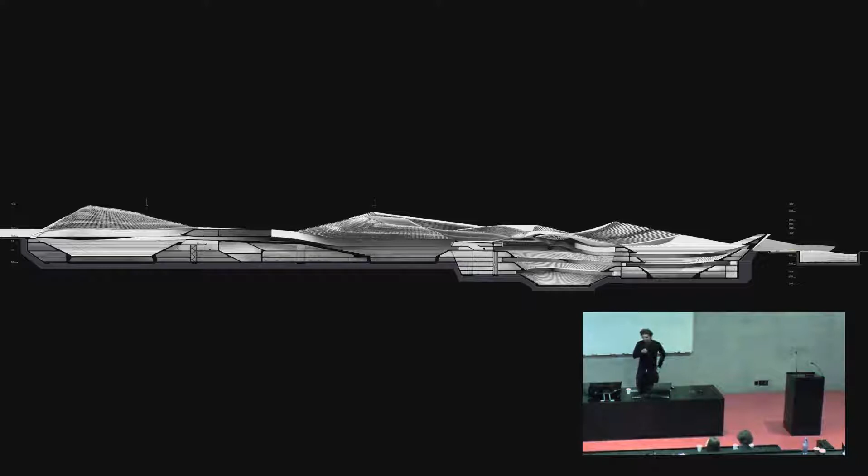So the theme of today's presentation is integrated infrastructures, and I will start with a section I produced in 2009 as part of my diploma project in Vienna, which speculates on a new kind of Olympic village, where all the stadia connect into one giant infrastructure. Spectators then have the opportunity to see multiple events at the same time, with the benefit of the close proximity of the different stadia.

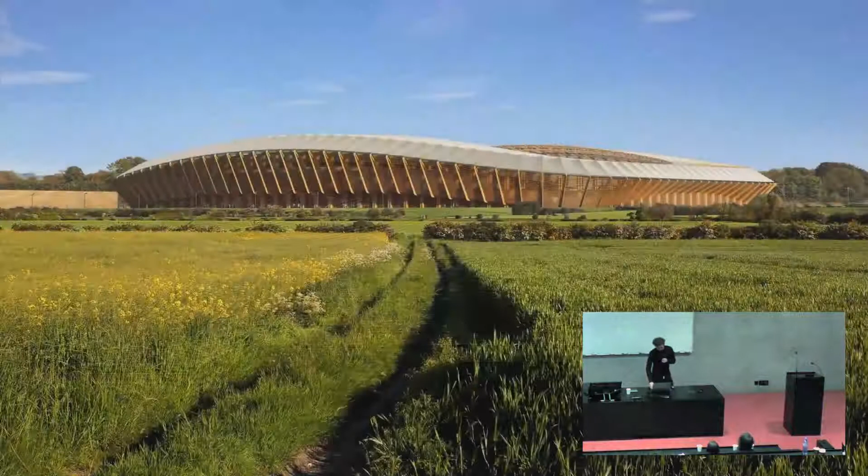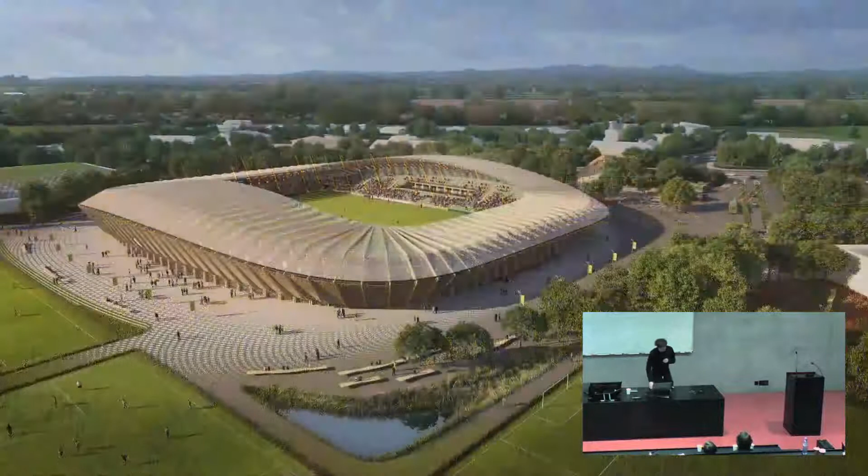I think this section was quite instrumental for me, so I'm going to show it again. It led not only to a passion for sport typology in my professional practice, but also, along the way, to other themes like structural clarity. I was always interested in expressions where one can clearly read the relationship between tensile and compressive forces. So, multiple stadia that I was involved in.

Then I'll jump to this one, because two years ago I got a brief that allowed me to revisit the idea from my diploma project. The brief was asking for a football stadium and an arena, and I tested whether this could work in terms of creating a new typology, where in one building system you integrate the football stadium, a multi-purpose arena, and a conference center in the middle, which you see in the section.

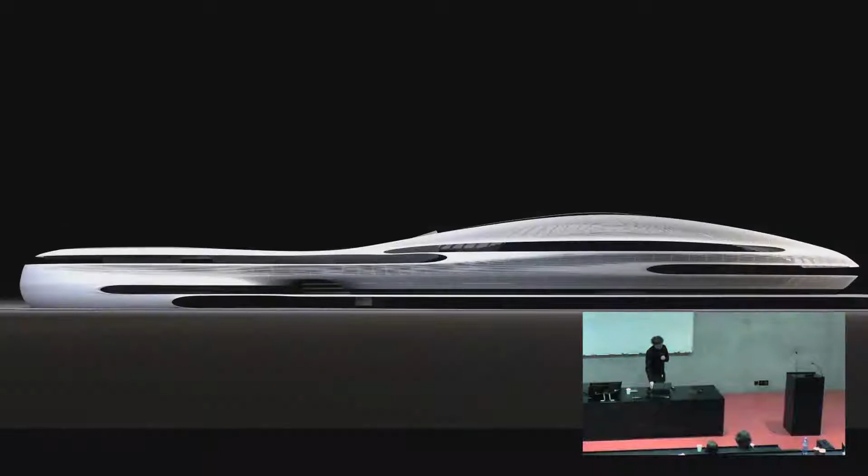What was also important was the introduction of ancillary program, so you can clearly read it through the cuts on the facade. I take a certain interest in stadia because they are the only typology where you don't have to argue for scale.

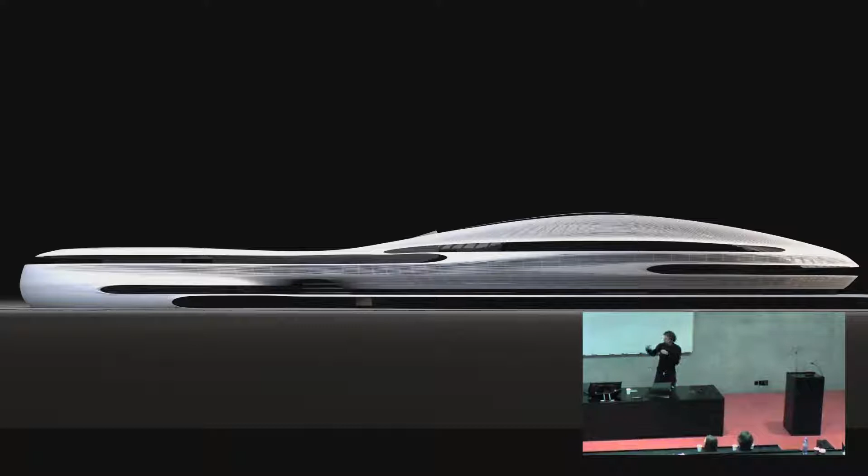Here you can see the face of the stadium, where the introduction of the cuts and the invitation of other offerings and programs creates a different urban face. You can see here that through the cuts you don't only read the program, but also the structural clarity that I mentioned before.

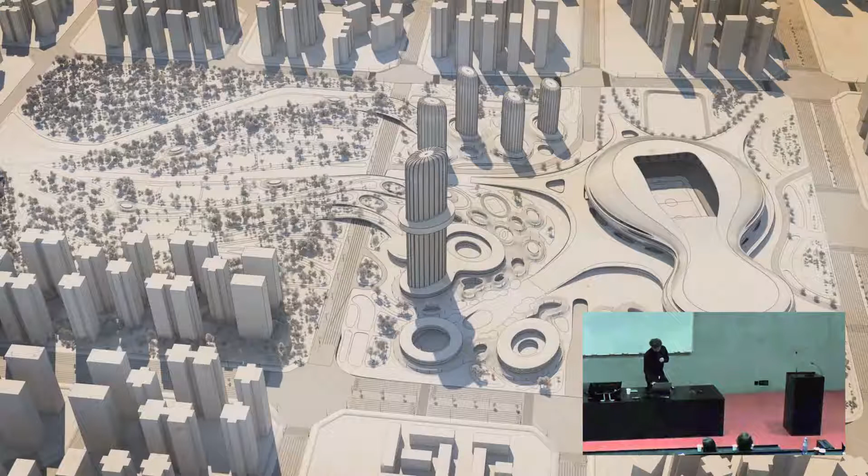And yeah, so this is how it sits there. I think this is how the venue is organized. Don't mind the fruit salad around it, it's more about the piece and how it operates.

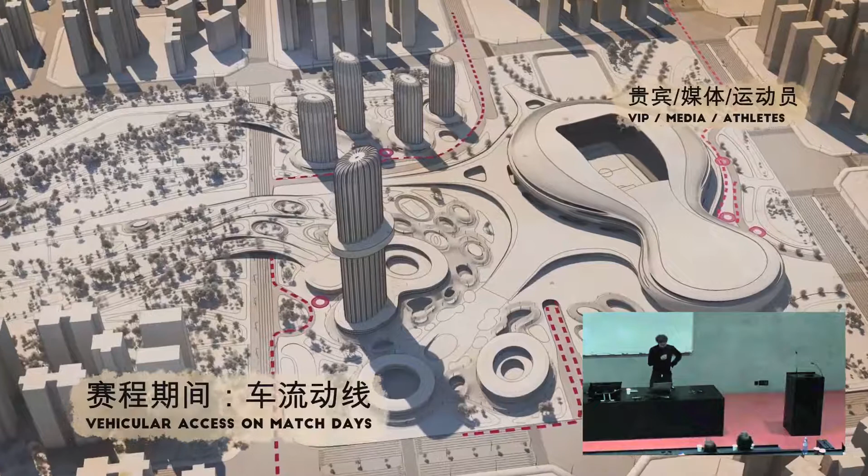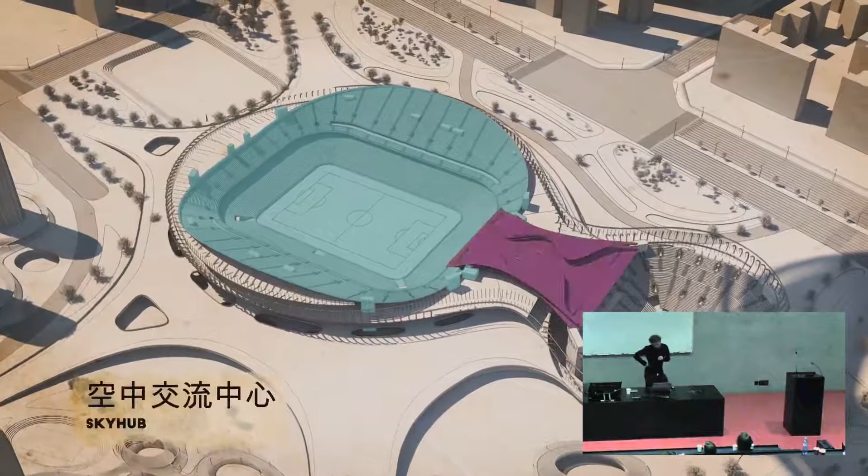So you see on the right the multi-purpose arena. In the middle is the conference center, and on the other side is the 60,000-seat football stadium.

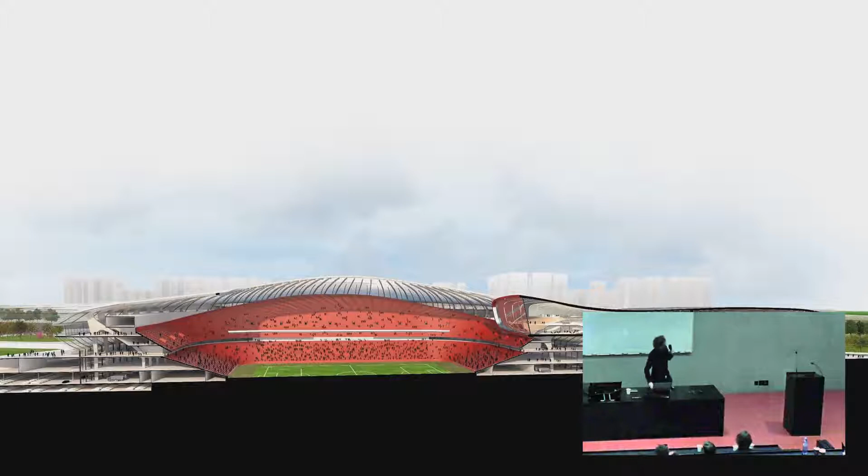When I revisited the section, it wasn't very different from the section I drew in 2009, so I kind of proved there was some intuitive idea that works. Here you see the inclusion of the other program, how the multi-purpose hall and the conference event sit there, and how it behaves towards the surrounding through the inclusion of the cuts and the program.

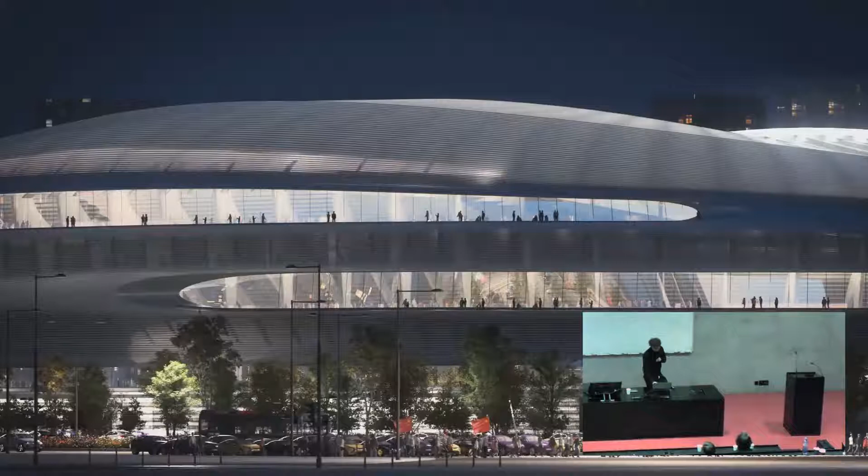This is how the inclusion of the additional program works towards the urban face, which I find quite successful. It sort of redefines the way stadia actually sit in the city.

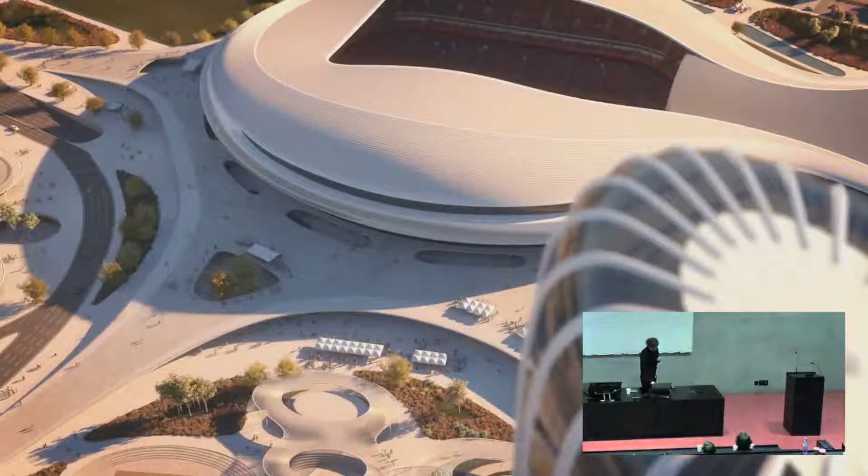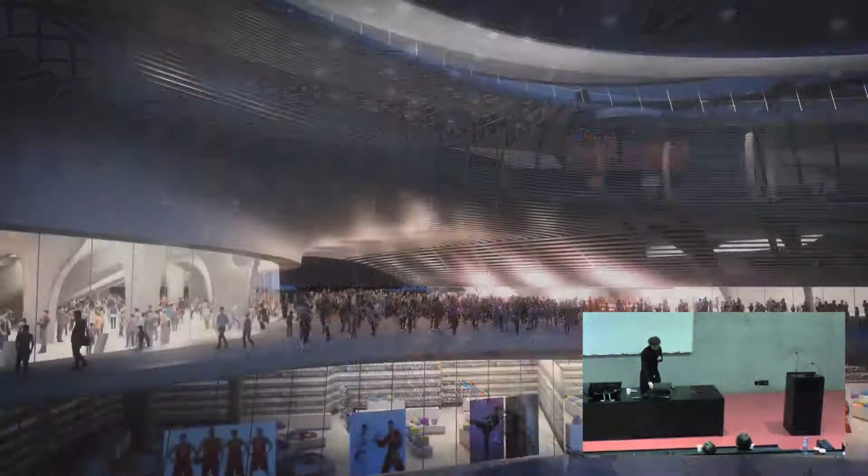I'll go quickly through that. You can see the experience at the same moment can really differ, from the football side to the conference center, and on the other side, as a visitor, you can experience the multi-purpose arena, which has several modes, from handball, volleyball, to boxing and concerts. There are also multiple offerings on the exterior, because redefining the typology also creates offerings for outdoor events.

And that led me into the theme of integrated infrastructures, where you speculate on the relationships of different typologies and what they could bring you in terms of architectural typology and expression.

So this is a theme that I then carried forward into my teaching. And I'm going to show you a couple of examples of what we're trying to chase in terms of integrated infrastructure at the Bartlett.

So I think the first one is a typology where we speculated on a new form of fish market, that it's based on a lab-grown tuna.

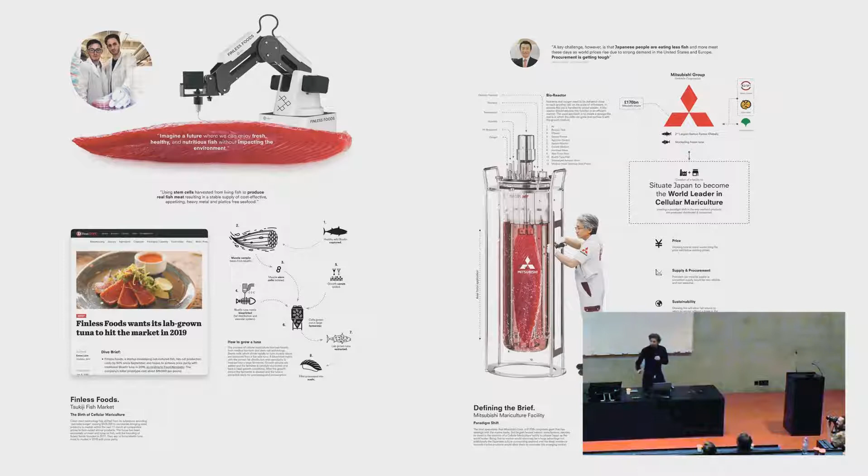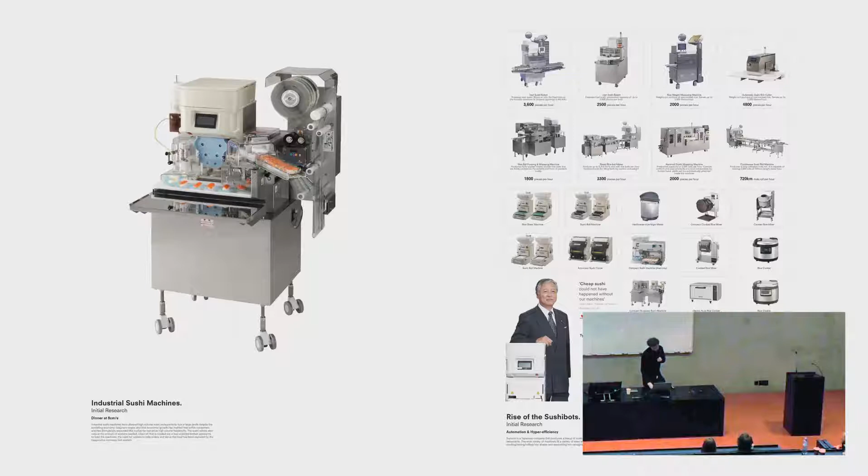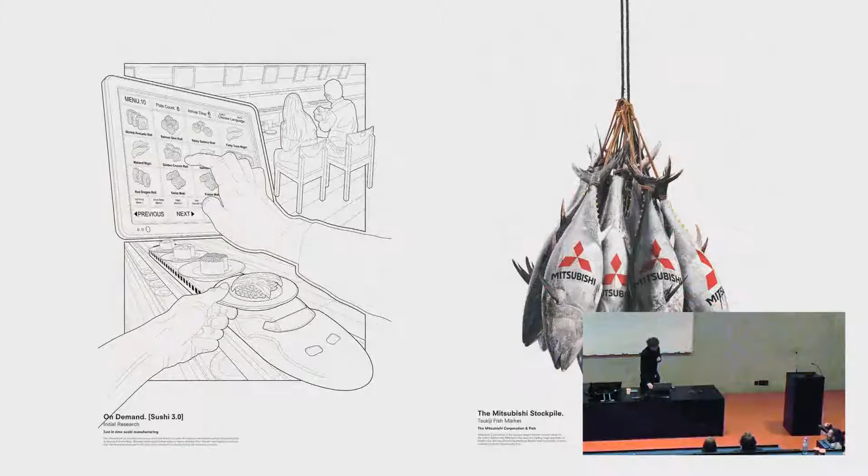I think it kind of plays with the idea that was quite present in Japan in terms of the sushi robots. They never really made it, but I think there was a very particular relationship to technology that the Japanese culture possesses. And also the idea of cyborg kind of comes in, the combination of organic and technology. As I said, it combines the production facility with the restaurant.

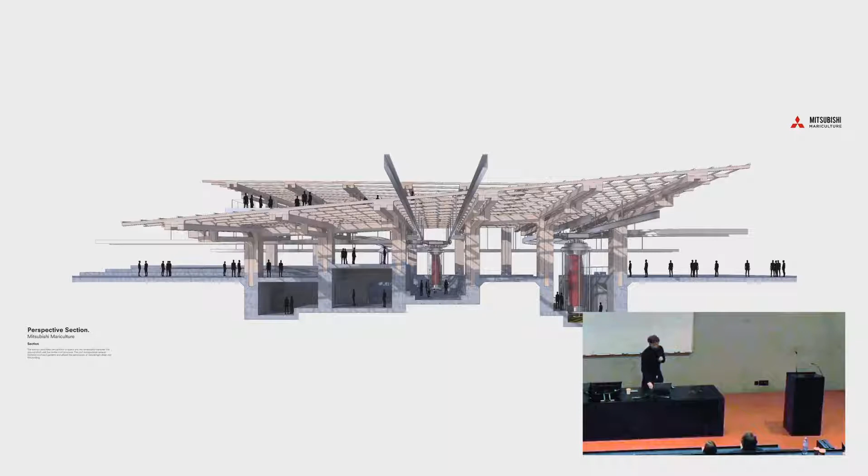So the basic idea was the relationship of a plinth that actually has the production facility in it, and then there was a kind of idea of a roof that is able to accommodate multiple programs, starting with the restaurant and going into the labs, etc.

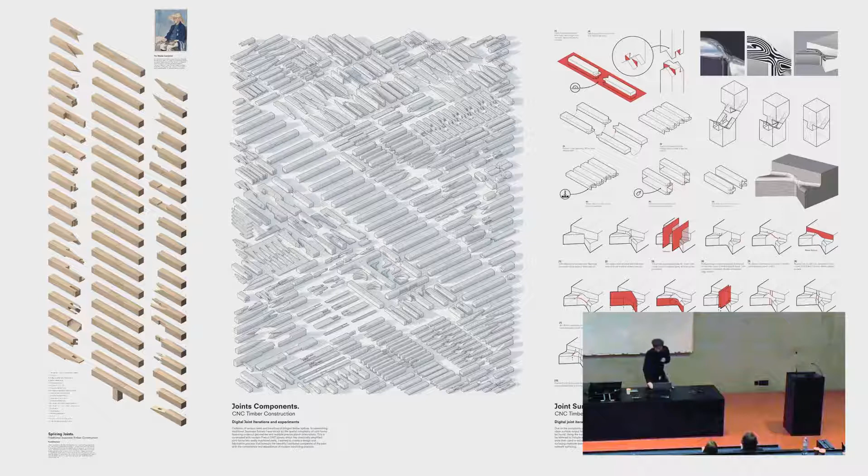Needless to say, we also take lots of interest in materiality and structural performance, so here you see the study into splices and into timber joinery. In my world, the joints within the building systems are all different because they respond to different conditions within the building, so they take different loads, different bending moments, etc.

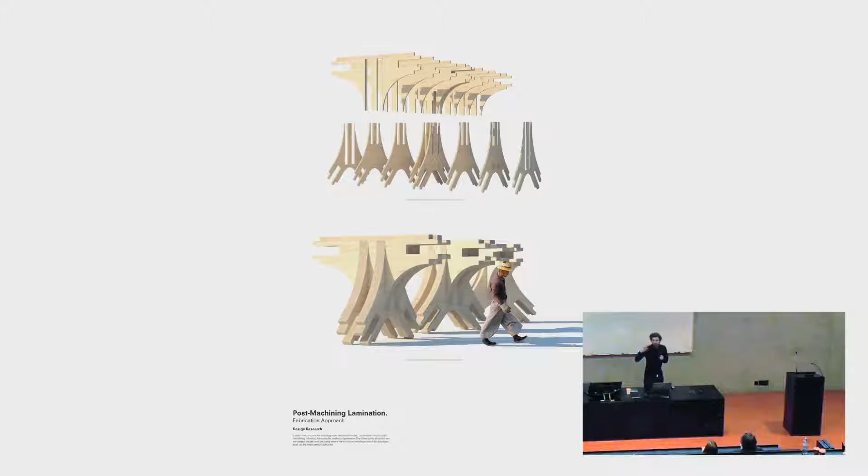So we also do lots of prototyping, and I think what is also important is the moment of the unexpected. We developed this layered joint that works quite well in bending, etc. But then I think the most unexpected moment was actually the scale of the joint, and it brings a very different offering to the architecture typology, and it gets much more intense when you speculate on that.

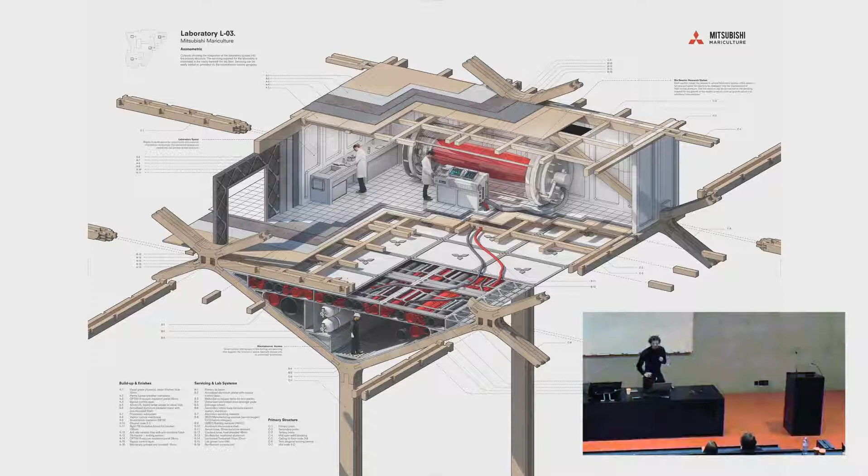So this is kind of the first encounter with the production facility. Here you see how the labs would be nested within that structural system, and then you can already read certain pockets within there.

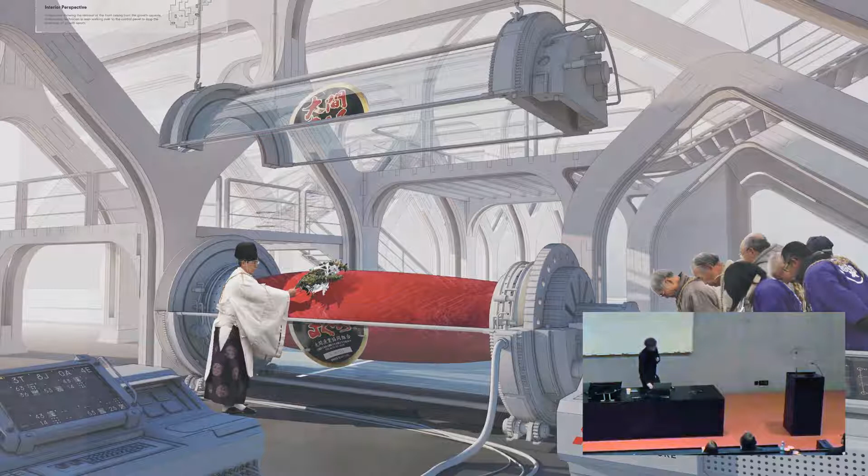This is a certain ritual that they always do when they fish a new tuna, so this is how that could operate with the lab-grown tuna. This is the auction facility that operates within the roof, within those pockets I was talking about before.

I think this is the kind of very calm elevation that basically brings the new typology, but what's behind that is the kind of very intense section that plays with the idea I presented at the very beginning on that sketch. So it really evolves into an organism that's able to combine the production facilities, the labs and the restaurants into even some Japanese courtyards here.

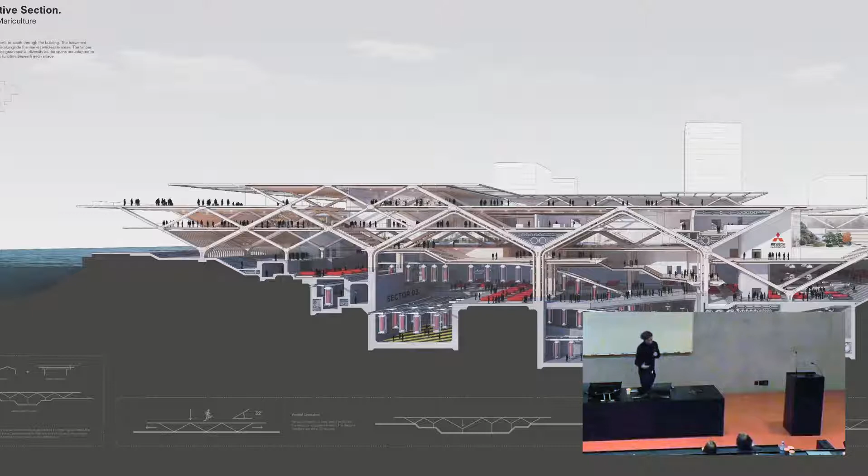So one is then able to create enclosures within the roof structure, and it doesn't operate on that logic of a plinth and a roof alone, but it starts to be much more. That's why you create a very integrated food infrastructure in this way.

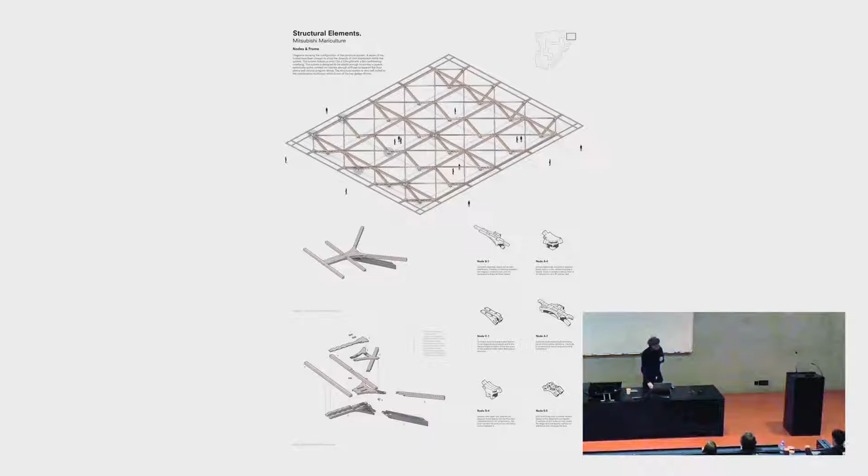Yeah, I mean, we take lots of interest in the structural performance, so actually it's quite elastic because of the seismic considerations. I'm going to skip that. So this is how the morning would look like, the new lab-grown tunas.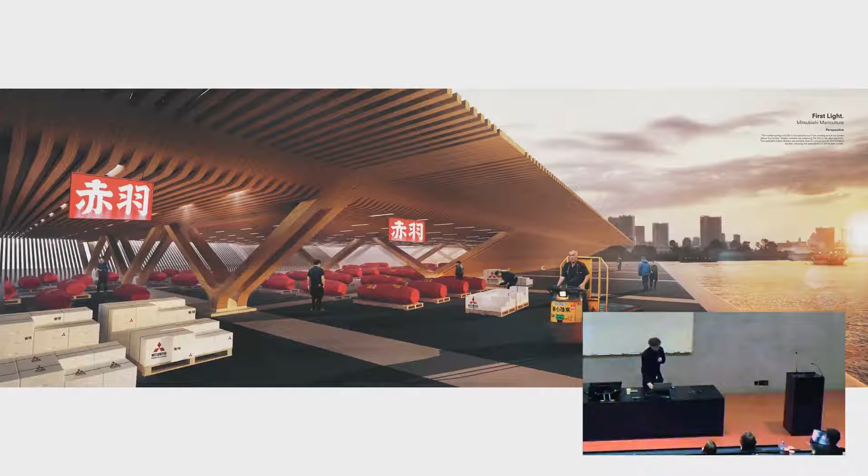And I think let's stick with timber for a while. This was a project we did this year. We used to call it Timber in the City.

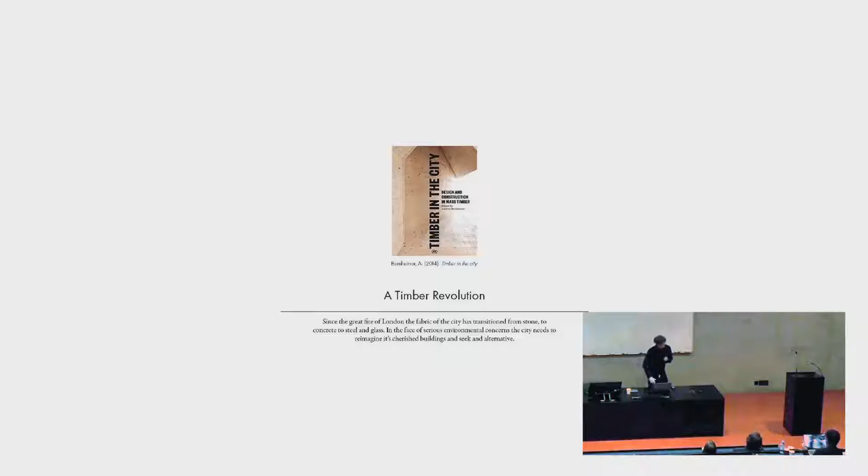I mean, here's timber in the city. But it's actually a speculation of what will happen if our civic infrastructure, as we know it here in London, would actually be all timber. Because, you know, it used to be that way, and I think there is no reason for ignoring timber on a large infrastructure project.

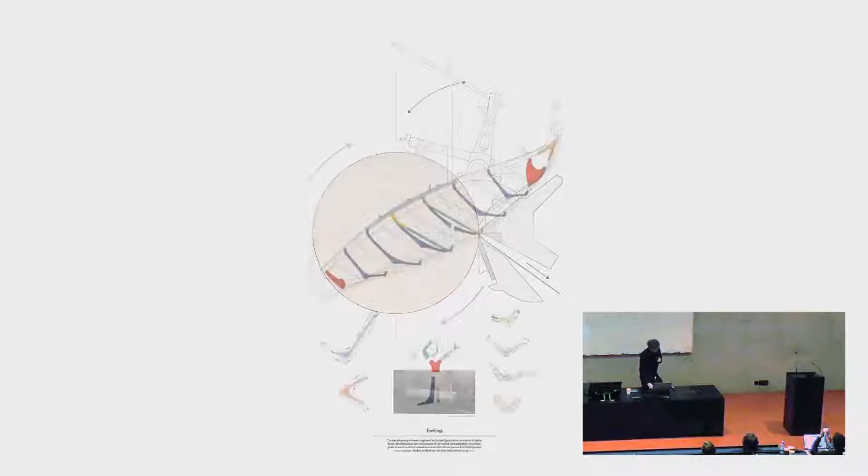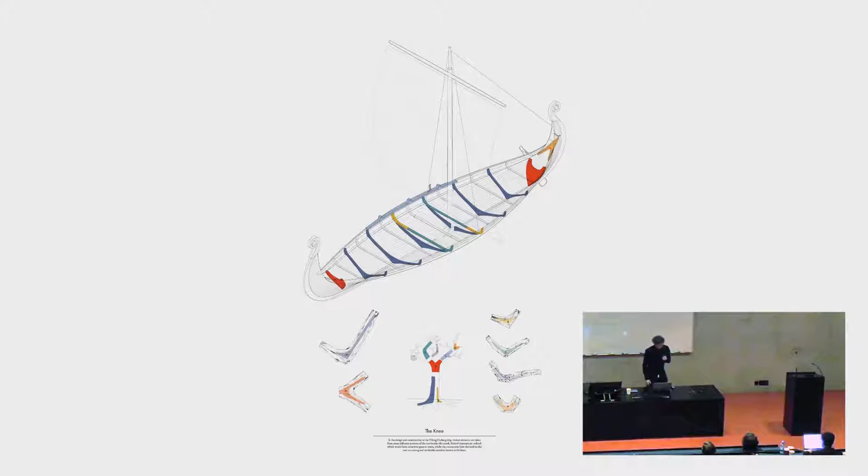So we started with the speculation of how a large infrastructure project in central London, all built in timber, would look like. I think this is an interest into the anisotropic properties of the material, recognizing and learning from the past, recognizing a different kind of grain pattern and how that contributes to different components, and that timber is obviously highly directional, so how it was used in the past, how that directionality was harnessed.

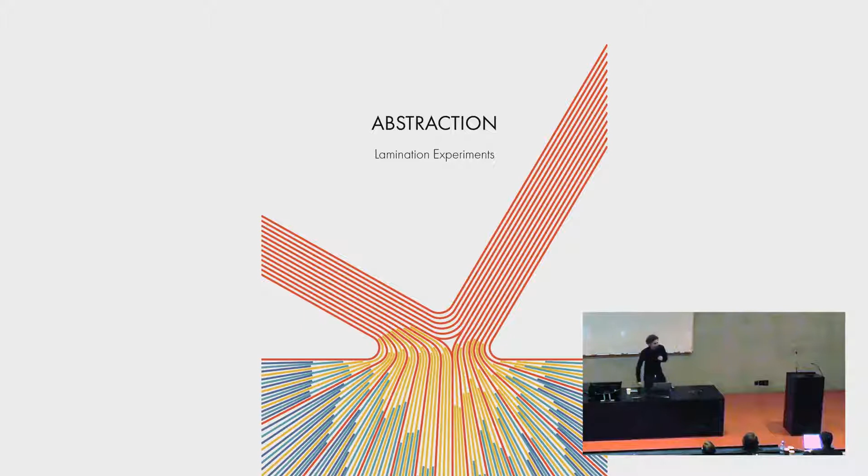And then going into the concept of lamination, but on a very different scale than is usually known. Almost thinking of lamination as a form of additive manufacturing, adding layers, so there are multiple components that all work together.

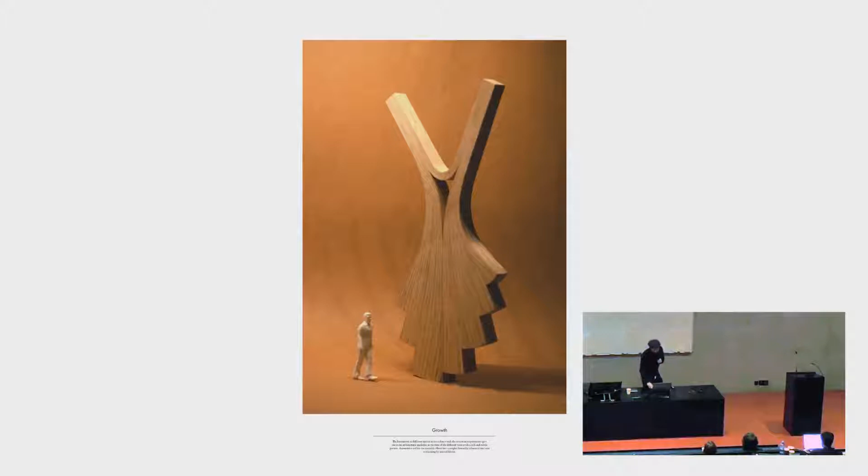I think again the scale is quite important. This is a model of a joint that is quite intense in scale, but it's all based on the idea of lamination, physically tested.

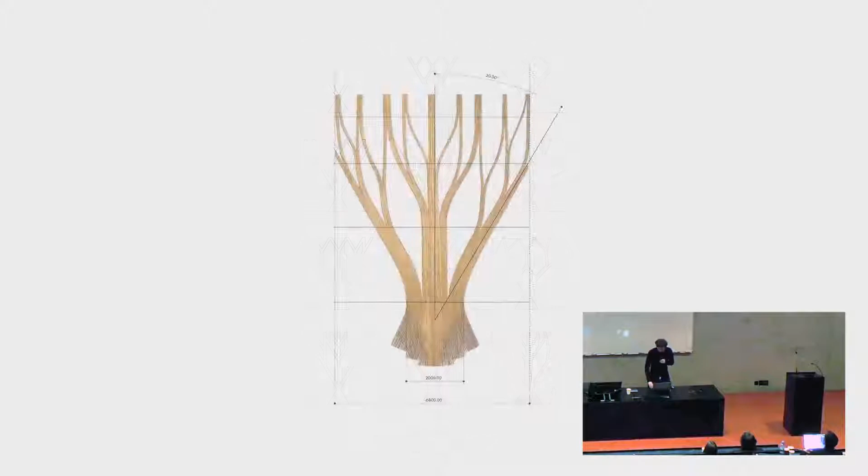Through that process you start to recognize the constraints in terms of scale that the timber structure would have, and also understanding these particular moments where you find the bending. This is something a tree does all the time, because timber is twice as strong in tension than in compression.

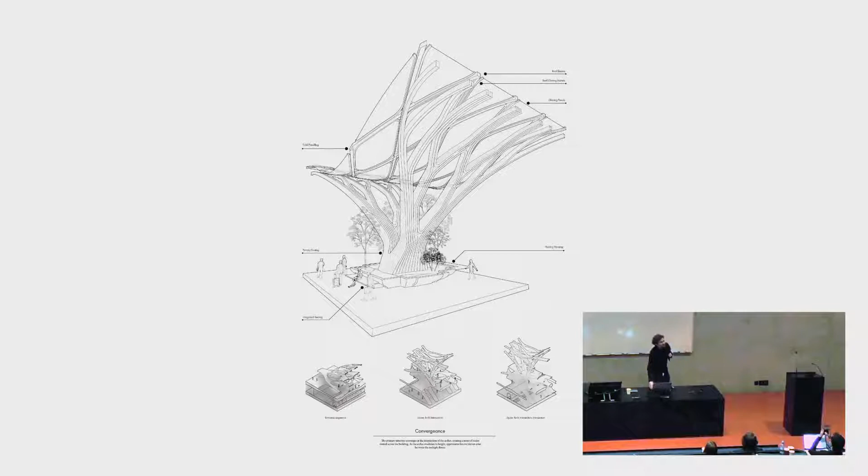So this is how it deals with bending, and then abstracting that principle and bringing it into the idea of the three-dimensional lamination that you can see here. It's not a coincidence that a structure like that would resemble a tree, because the principles are quite the same, how that works with the forces.

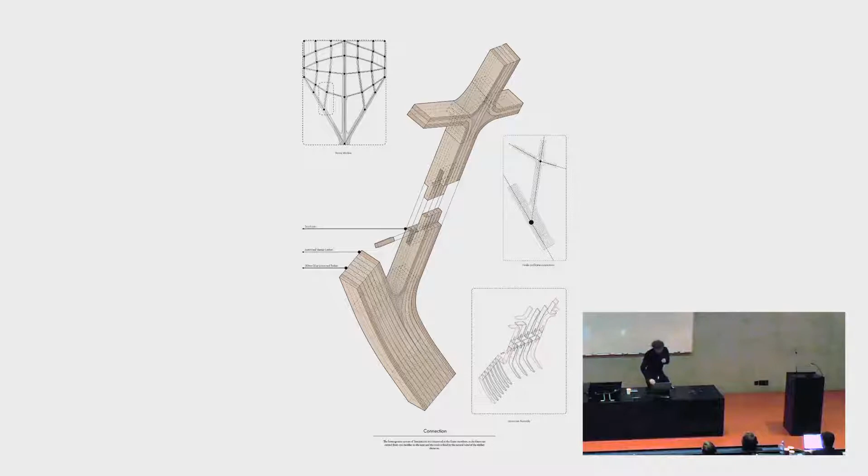Then obviously, again, there's splicing. Here you see the lamination. Again, something you need to understand is the scale of the component - some digital as well as physical testing.

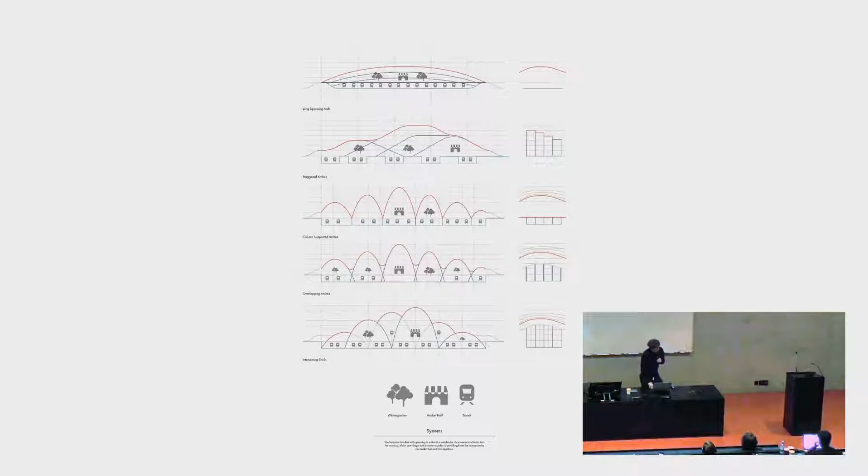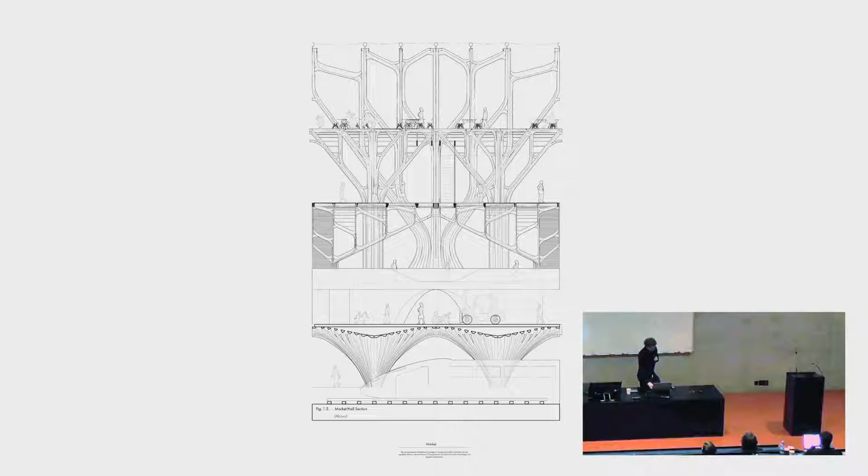Once we defined the constraints at the scale of that, we started speculating on the typology, and we developed a similar proposal to the project before, where you have several layers, starting with the train station, going all the way to the market, and always having nested restaurants in a higher portion of the roof, familiar with the relationship between tensile and compressive forces and what pattern they give you.

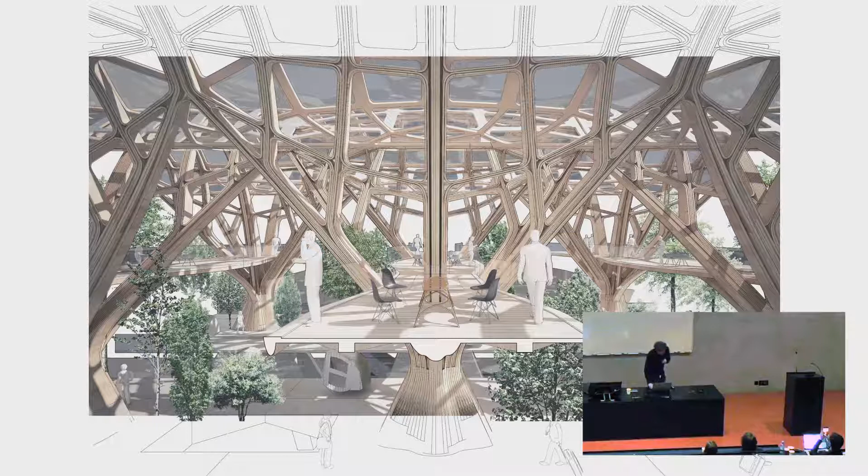And then this is a first glimpse into the very intense system of the 3D laminated structure. You can see how the parts are nested into that, how you start introducing program into that roof. You can see here the botanical garden above a train station, a glimpse of that.

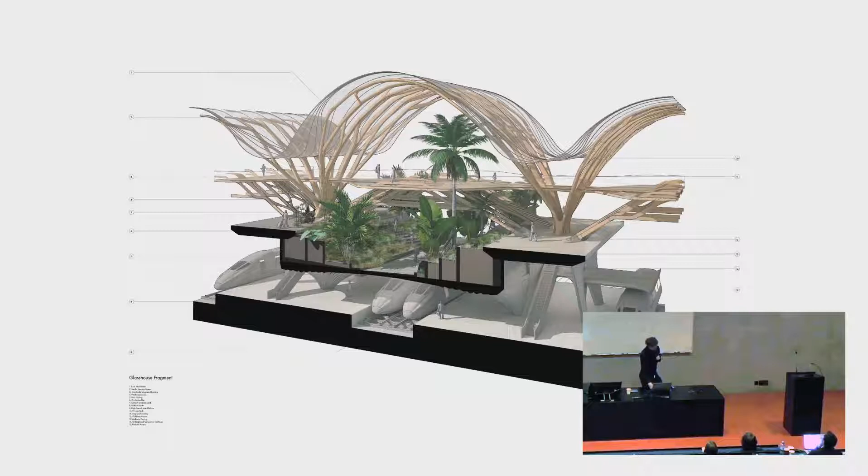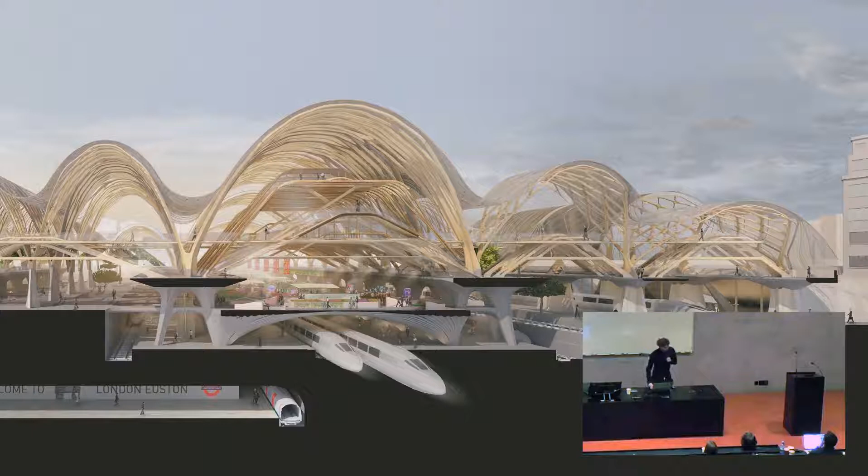I think it gets even more intense in the long section. Here you see the inclusion of the garden, how that works with the trains, and here you already start recognizing how the roof system is able to create enclosures. And then this is the kind of answer of Timber in the City.

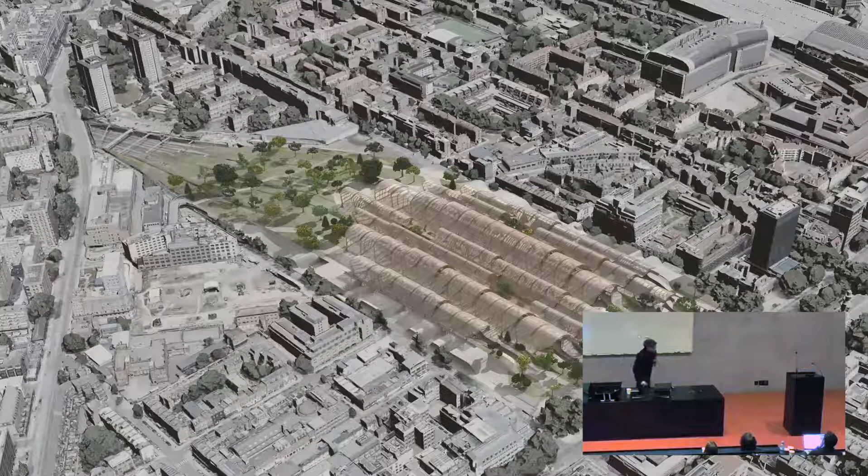That this is London, Euston, all in timber. I think also urbanistically, the edge towards the city is quite successful. Here you see a portion showing the program with the enclosure, so there could be restaurants, F&B, and other commercial opportunities.

And here you see the market. And here you see the cross paths - they're actually going through the entire station, and that connects the different programs.

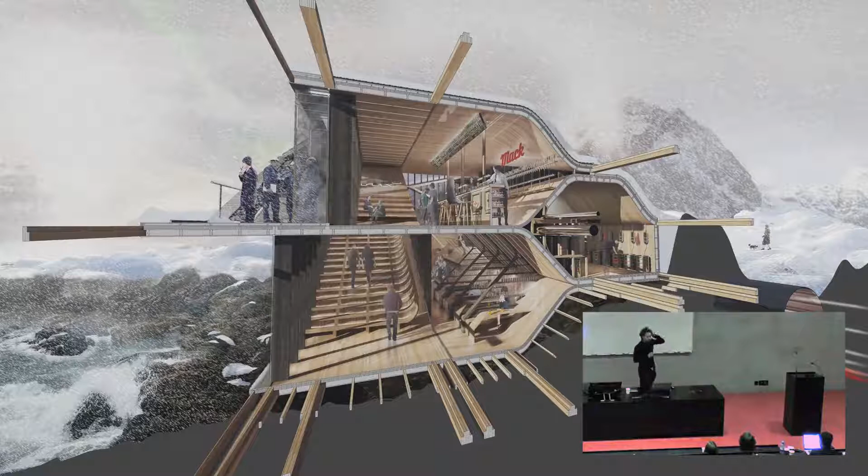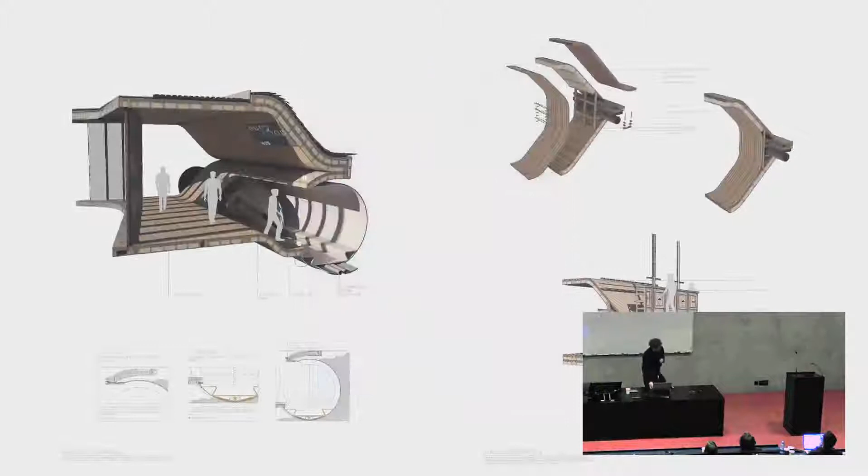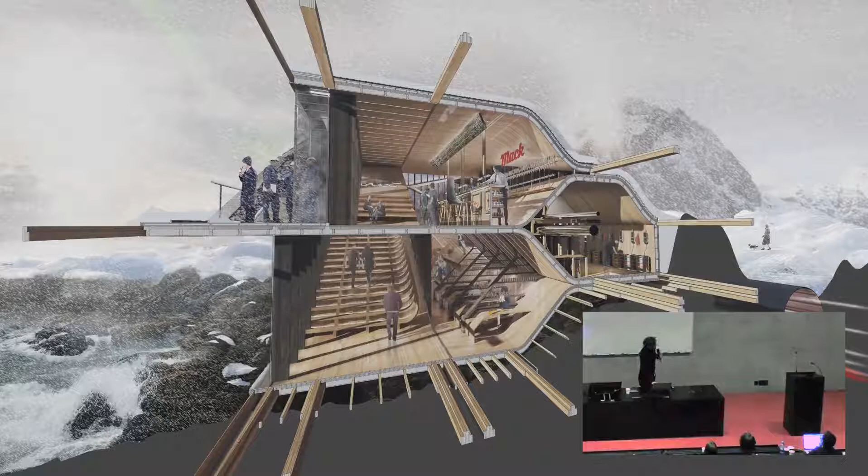So this is a railway station combined with a railway pub in the Arctic - the most northern brewery. You can see this bit of beer infrastructure, and how the typology of the pub actually influences the railway typology.

So, yeah, joinery is something that we're very much interested in. We argue for the full flavor project, so no hiding in the abstract - trying to articulate everything and then assessing that.

Yeah, so that's enough of timber. I'm going to flip quickly through some more urban proposals that we looked at. There was a project where we speculated on a massive population growth in Seoul, Korea, followed by the reunification of the peninsula.

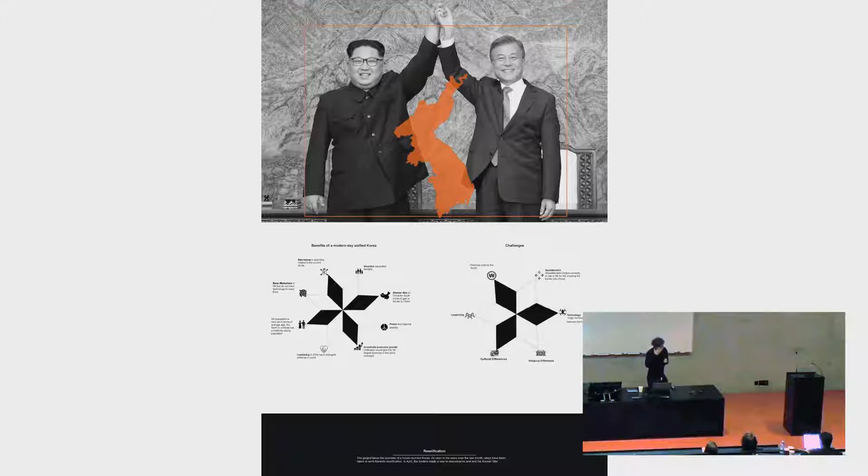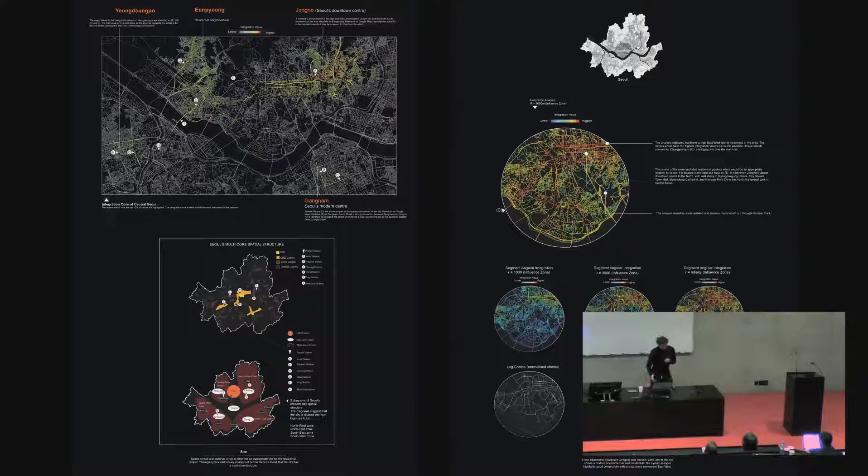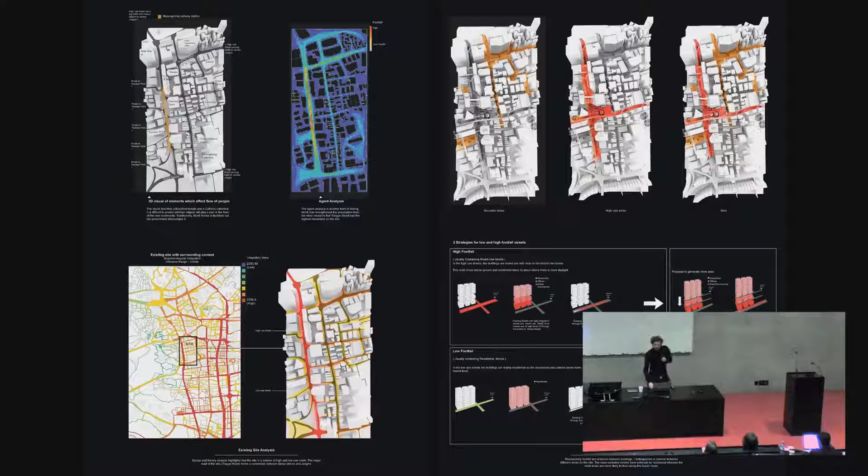So kind of obviously developing certain tools based on space syntax and understanding the spatial opportunities that such a dense urban fabric offers. Through that process, looking into the urban fabric of Seoul, we concluded that the streets and roads are actually a great opportunity for ultra densification of a city, but not at the expense of losing its character.

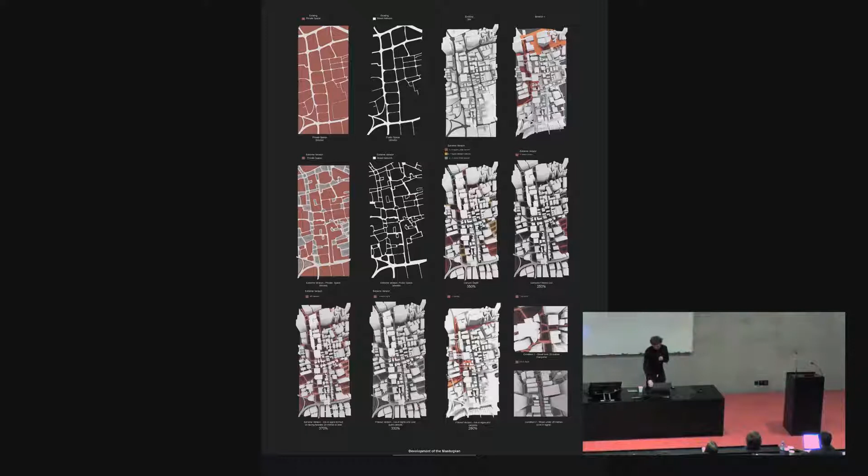So there was the idea that instead of adding a volume, you basically re-question everything within a certain area or the road systems, and you see the spatial opportunities that are there. So you dig down and start exposing basements, bringing the character of what is perceived to be overground also into the underground city.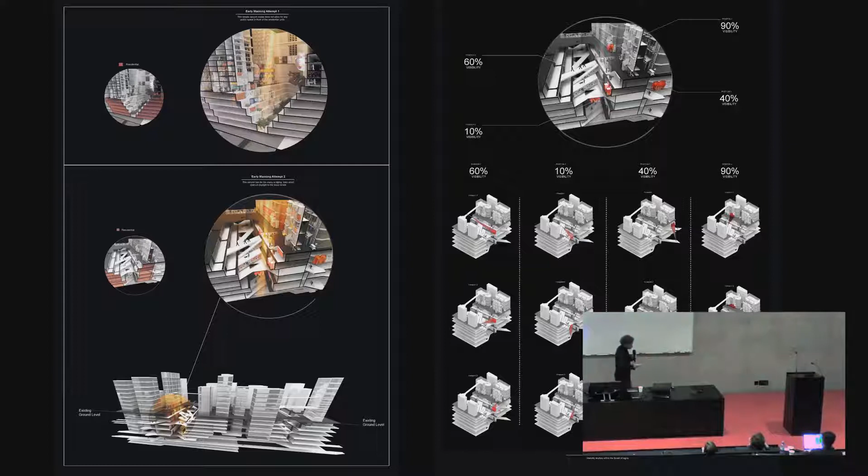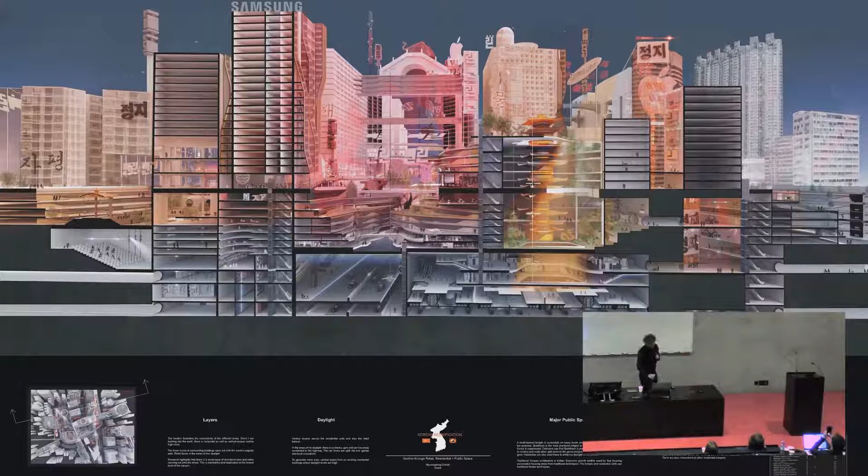So in a way, shown on this simple image, before and after. This is how you seek additional opportunities within our urban fabrics, and then you're able to achieve a certain ultra densification. This is how intense the section would get. You can recognize different pockets, almost cultural pockets, then more commercial pockets, and how roads and infrastructures are nested into that.

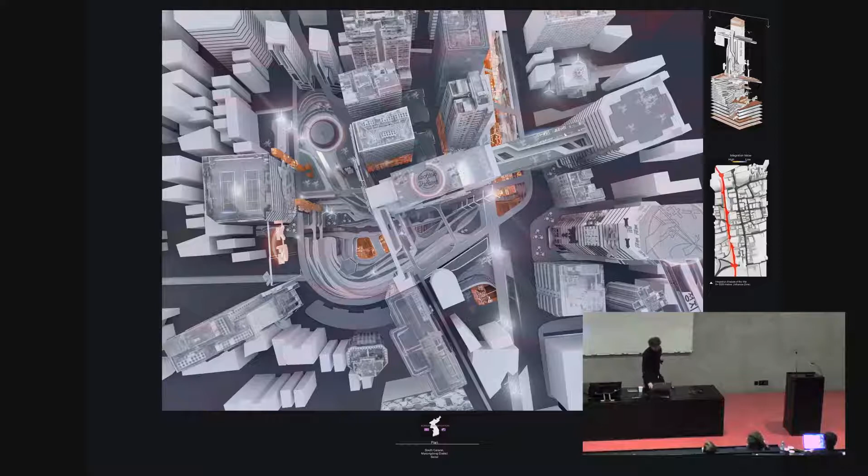And then I think what was quite important, we were trying to prove that you can densify a city without it losing its character, because I think Seoul is quite particular in that way. So I think the cyberpunk moments within that got more and more intense as you were adding additional urban fabric and finding opportunities there.

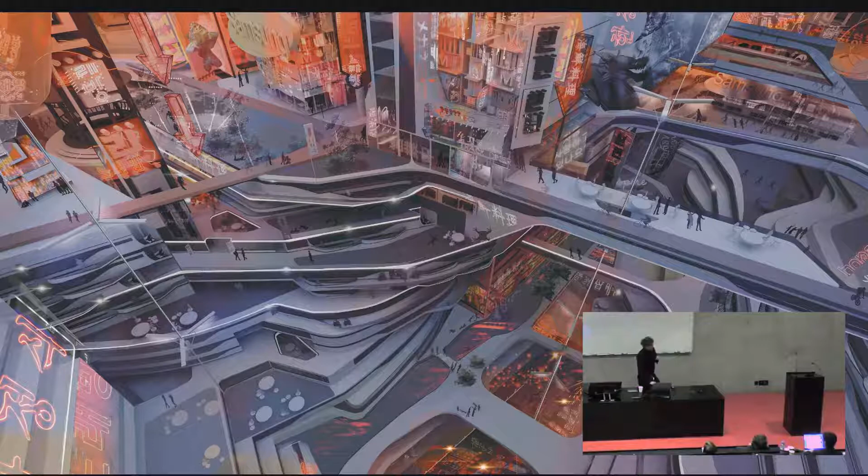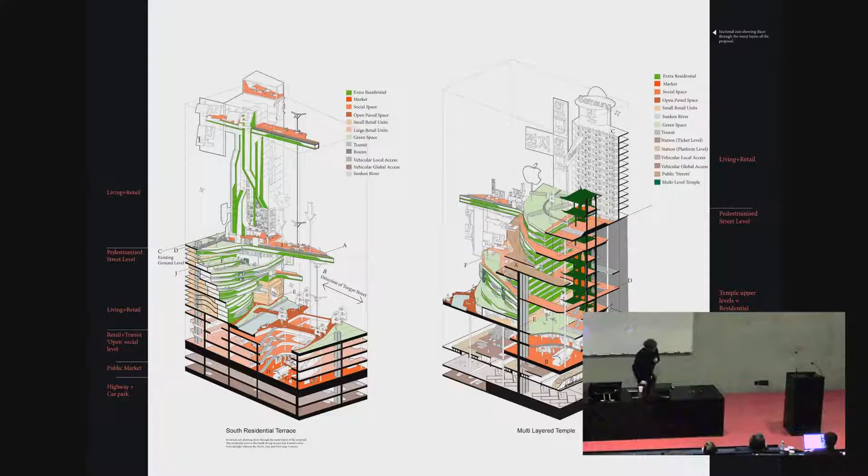And then there were the ideas of the hidden rivers, and how they would nest the program. So this is a section of how that would look like, starting from the original level, and then what nests underground. Some of the detailing of the terracing that occurs there.

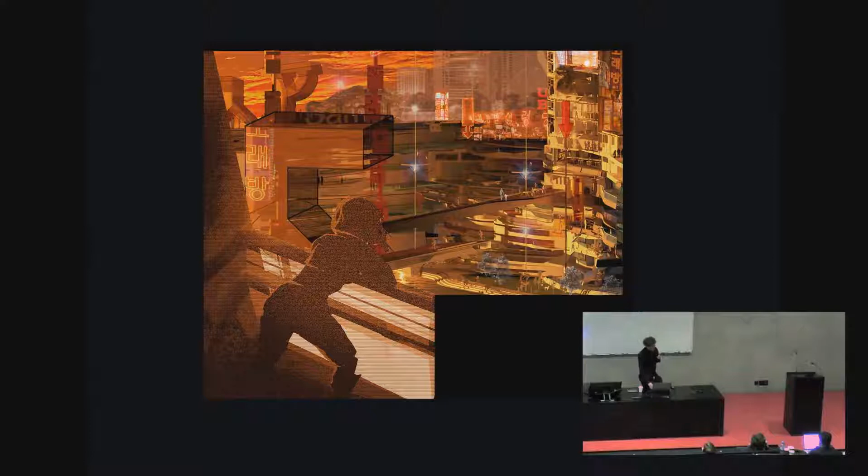And here you see the section combining the traditional temple on one side, because I think the temples actually follow a similar logic — they're layered in time. And on the right side, you have the more commercial districts that could offer. I think the cyberpunk aesthetic was quite evident in there.

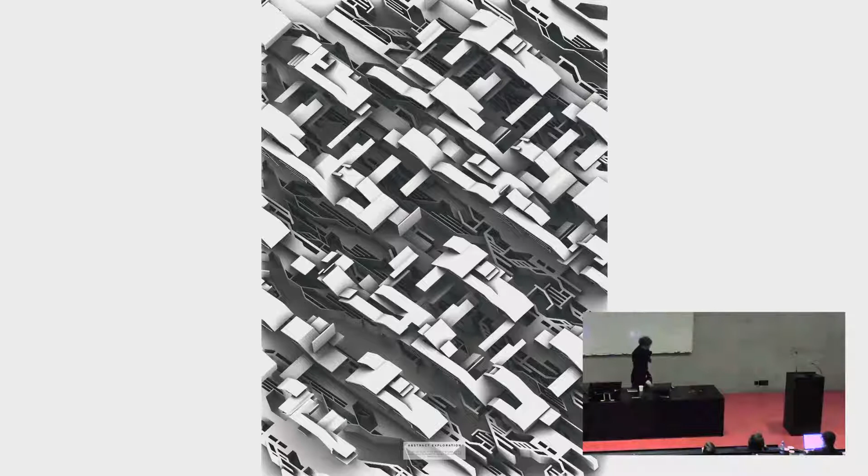Another urban project speculates on the extreme use of oblique. That one we located in Hong Kong, and I think what we were chasing here was the integration of all the flavors that Hong Kong could offer. So we've done a horse racetrack, nested it in a very extreme oblique cityscape that occupies that and flows under and above the racetrack.

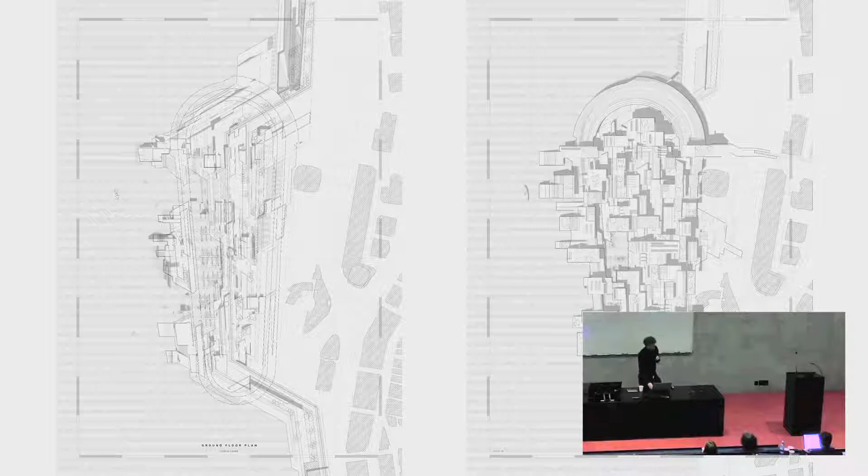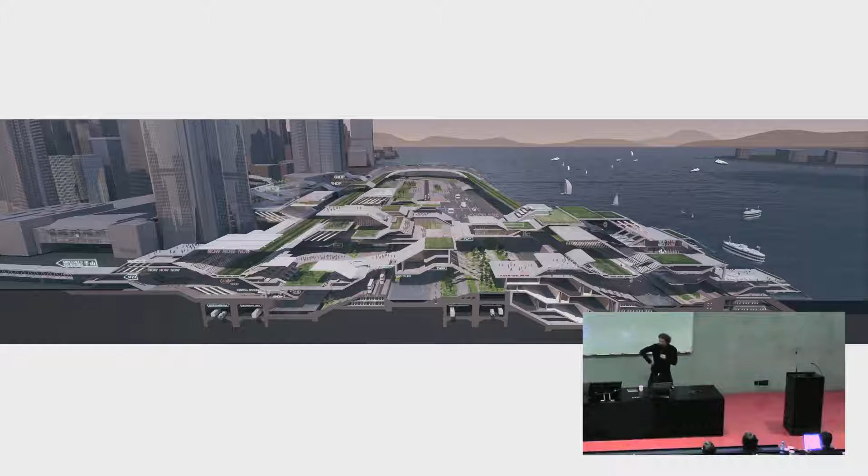There's also a marina nested in there and several food markets. It was a certain critique on how Hong Kong is currently dealing with its waterfront, an attempt to reactivate that and have a slightly different take on land reclamation methods. In the section, you can see how the horse racetrack is interwoven into the city fabric, and what the oblique planes could offer for the urban typology.

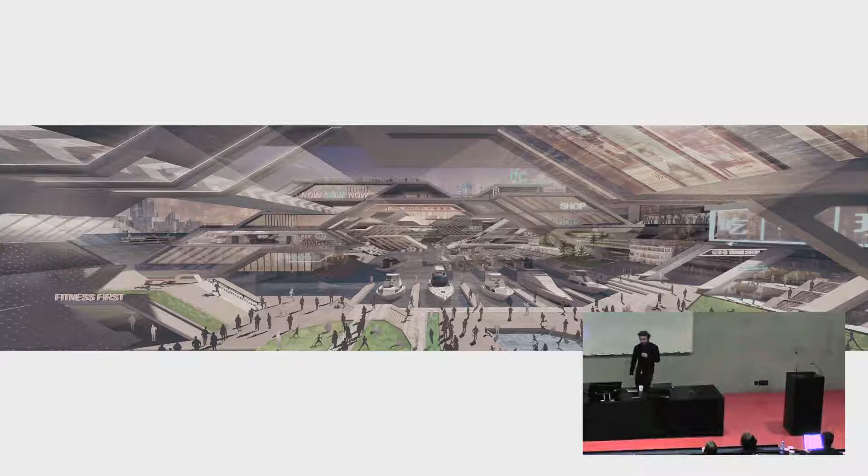So you see the jockey club, then the horses, then there's also a marina nested there, and a boat terminal. Here you can see the marina, how it's nested there, and it speculates on urban design from a slightly different perspective, because what it tries to intensify is the character we observed and found in the Hong Kong fabric, bringing that back to the waterfront that is currently quite dead.

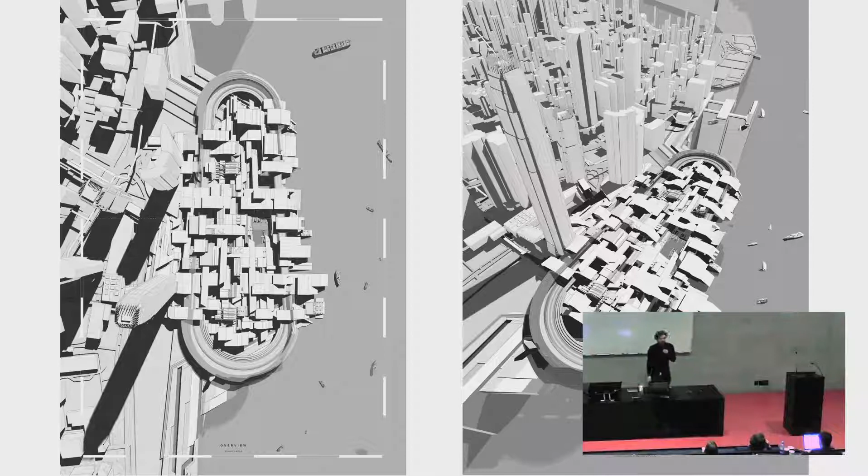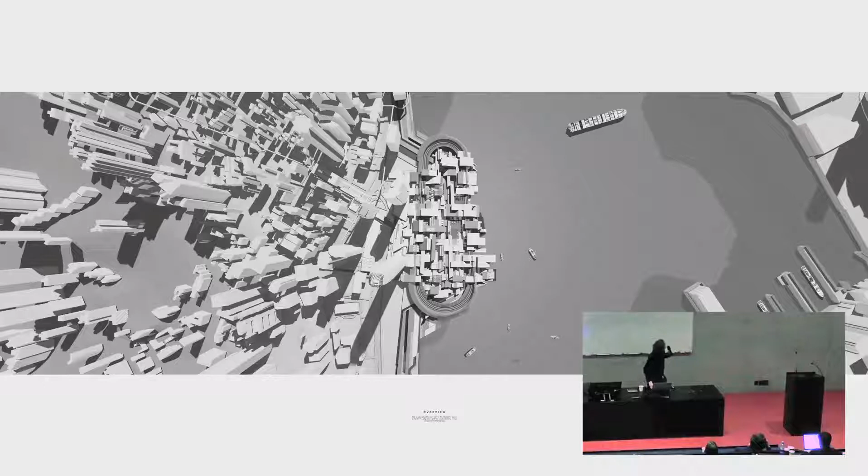So that's how the horses will run. So there's some overview — you can see how it connects to the scale of the fabric behind the skyline that is there currently. In a way, it continues the grain of the city on the left, which is being disconnected by the commercial development on the waterfront.

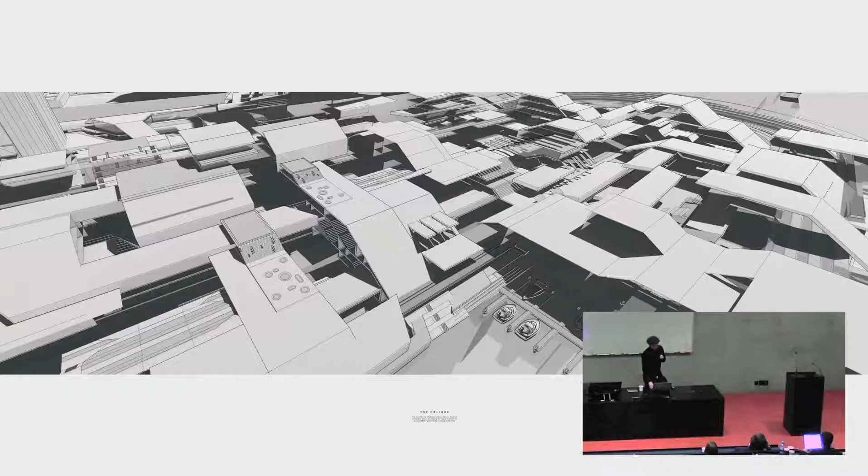And I think that's it.